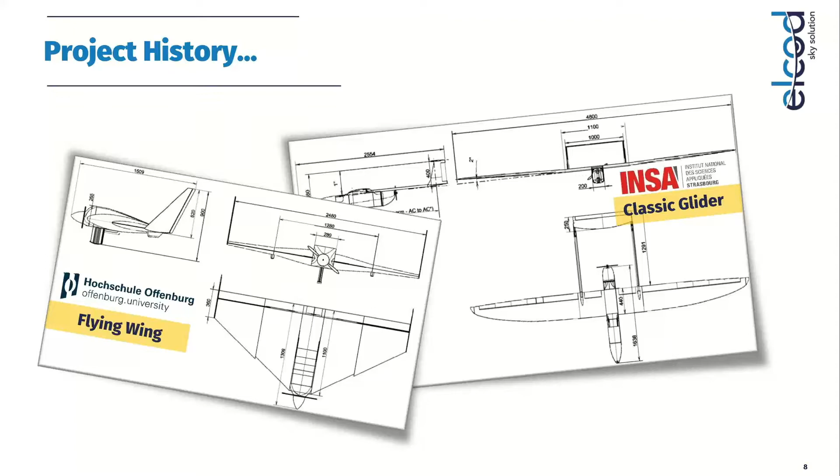So this results in 2 different basic concepts, also with some differences in the applications we had in mind, and this results in different building strategies. One was completely built from a wooden structure, and the other one with a fiberglass construction and molds. And so we will see that later on in the presentations of the 2 different designs, namely the Stork design of the Strasbourg team and the Delta design from the Offenburg team.

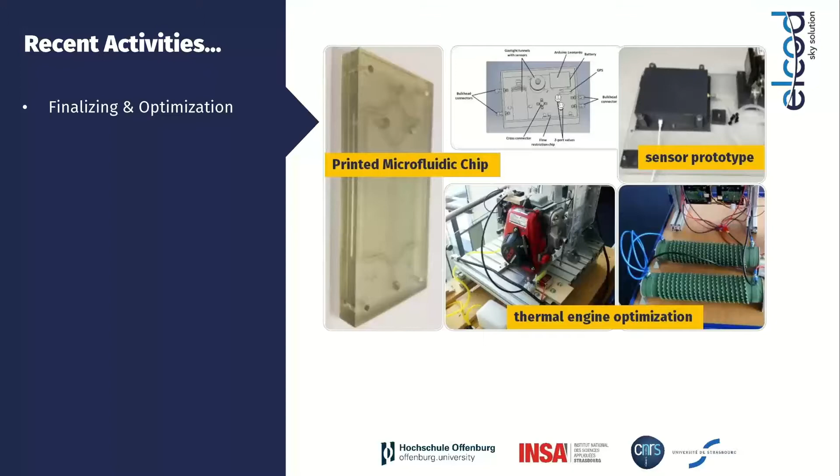In addition, we are happy to announce that there are two PhD theses starting now based on this project. Two former students that were participating in this project are now starting their PhD theses on different topics, and they will present you more details on their topics: optimization of energy management for a fuel cell based drone, as well as studies on flax fiber and flax fiber composites used for building drones. And you will see more details later on.

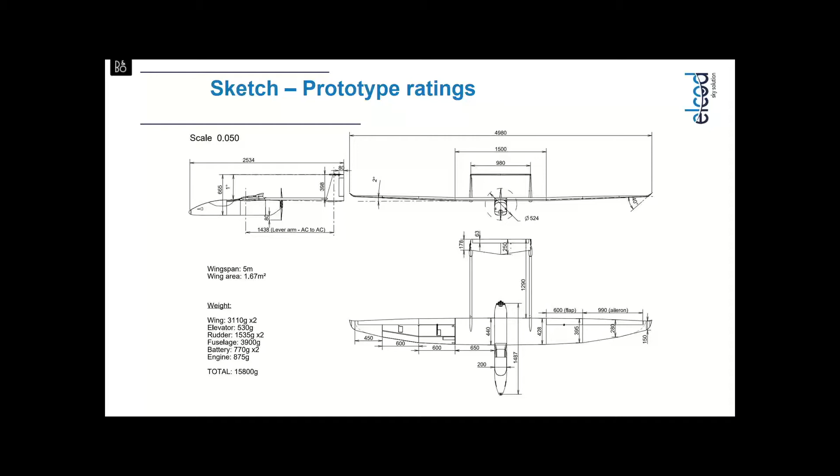Concerning the estimated performance at the beginning of the project, we estimated that the consumption would be about 360 watts at 25 kilograms with a velocity of 90 kilometers per hour, and with an efficiency...

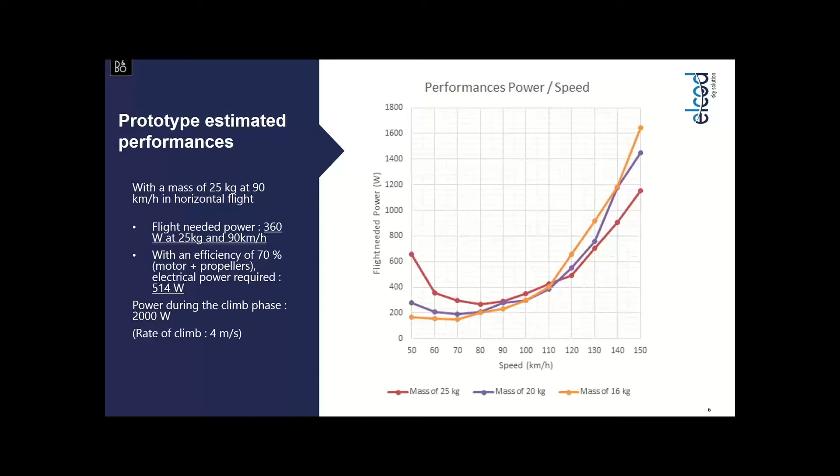...performances and the real consumption of the system. Here you can see a global assembly of the prototype and the different steps of building.

For the fuselage, we have chosen a classical way to conceive it in composite fiberglass and carbon, by conceiving the molds on a master building foam composite. The first wings are classically tooled by hot wire, and it will be composed of a sandwich of foam, wood, and carbon fibers.

The wing joiners you can see here are providing carbon for the tests and for the final system.

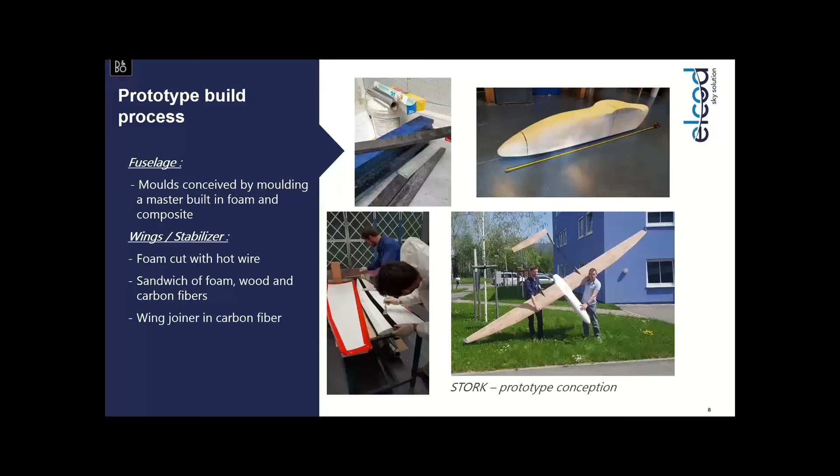Concerning the system assembly, we are able to embed a fuel cell of about 1000 watts from HES energy system, a hydrogen tank of 6 liters with a maximum pressure of 300 bars. The brushless motor will have a power of 2000 watts, and the weight, as I've said, without the fuel cell is about 16 kilograms.

Concerning the flight controller, we are using an open source Pixhawk 4 with the PX4 open source system, with GPS and so on. The power board has been designed by our team to be able to switch between two sources in case of failures, and the estimated autonomy...

...the tank, the fuel cell, the system for the payload space, and all the electronic and onboard system.

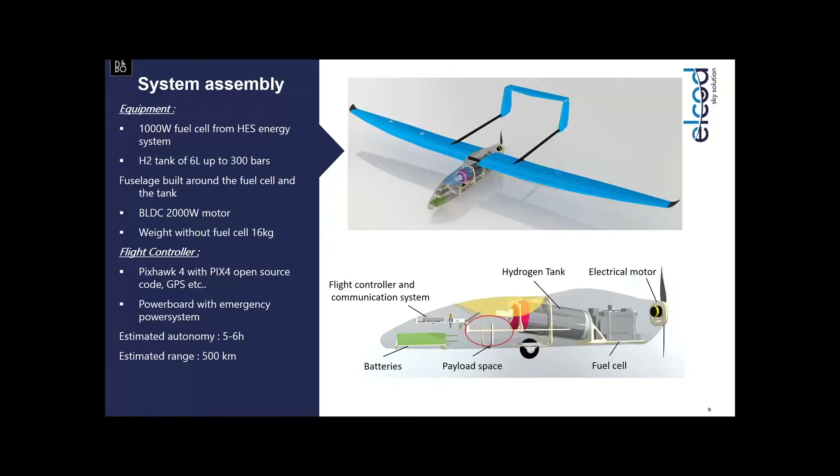Okay, so yes, the first prototype - we have done the first test flight in May 2020. For the moment we have done 21 takeoffs and landings, about 5-hour flights, more than 300 kilometers of traveling, with a classical cruise speed of about 90 kilometers per hour.

Finally, the power consumption has been measured in real flight at a mass of 20 kilograms, with flight tests at 20 meters per second, and the real consumption was about 400 watts. We have done some simulations with computational fluid dynamics and estimated the total power at 300 watts at 20 meters per second. So by considering the motor and propeller efficiency, it grew to 400 watts.

The stall speed for the system with a mass of 20 kilograms is about 12 meters per second, so about 40 kilometers per hour.

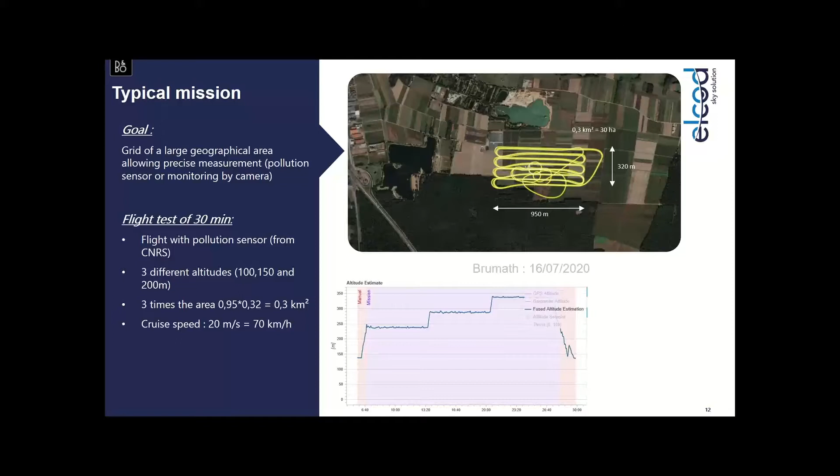And the flight tests have been done in electric flight without fuel cells, with a pollution sensor from the CNRS at 3 different altitudes: 100 meters, 150 meters, and 200 meters. And the cruise speed has been about 20 meters per second.

Another topic of our work is to do a dynamic control modelization of the drone to be able to estimate the result with a real flight compared to the simulation flight with the same real flight inputs of the system. And I will show you that later.

To conclude my presentation, we are working on the evolution of the Stork Mark II. The idea is to optimize the aerodynamic of the system by using molds for the wing, the tail, and the fuselages. The topic is to design the first biocomposite UAV with a fuel cell system, and the work is always focused on hybridization of the fuel cell, battery, and package.

Thomas and Martin will do their presentation about these topics. So the final design will be a 2-boom drone with motors and sensor integration, a wingspan of about 5 meters.

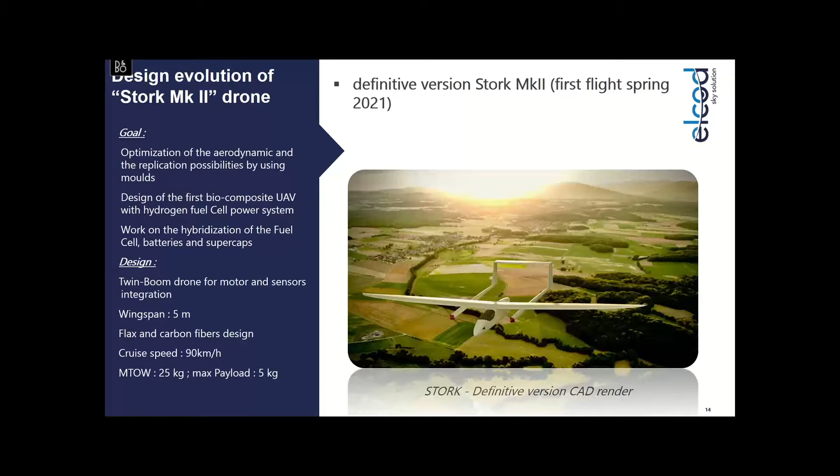The final system will be done in flax and carbon fiber design. The cruise speed is estimated to about 90 km/h, the maximum takeoff weight 25 kg, and max payload 5 kg. Here you can see an overview of the CAD of the Stork MK2.

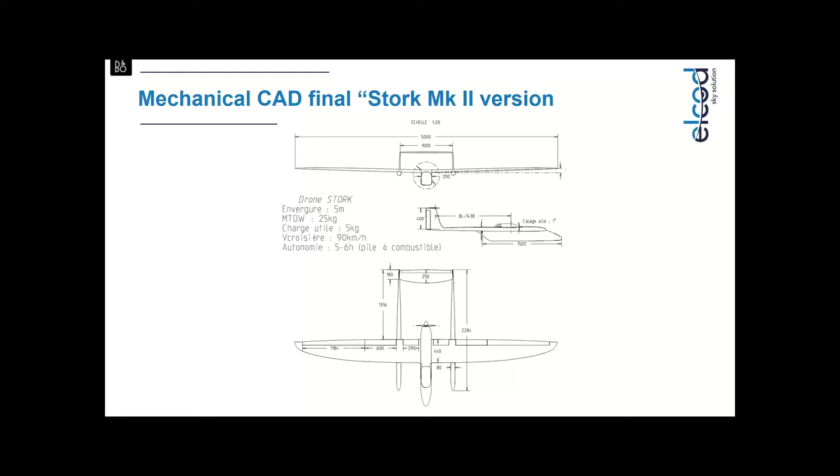For the moment we have tooled all the masters and built 2 of the 4 molds of the wing, and we expect to finish it at the beginning of next year.

To conclude, in spite of the context of COVID, the project followed a normal evolution, and we could propose at the end of the project 2 PhD theses: one PhD from Thomas Pavot concerning the optimization of the fuel cell system and the hybridization of the system.

It has begun the 1st of October this year. Martin Lefebvre is working on a biocomposite system, and his thesis has begun 1 year ago.

So the work from our team still continues. We are working on autopilot redundancy work, the optimization of the flight, the communication system, and the Stork building process, to be able to have a versatile system that could be replicated quickly. Thank you.

The structure is made of wood with a Ceconite covering, pretty traditional. The cowling is made of ABS, so it's simple to manufacture and repair. There's another word I can't read.

It's low cost, so there will be a wooden propeller on a 50 cubic 4-stroke engine with fuel injection. Stefan Steiger will talk about the fuel injection system. The engine is pretty heavy, but it consumes a very low amount of fuel, so this was the optimum for range and flight time. For communication, Iridium satellite communication will be used for long range.

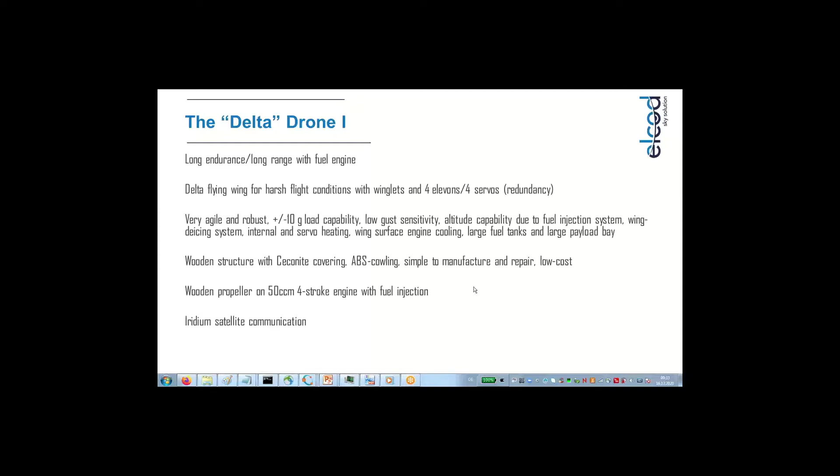Takeoff weight is 25 kilograms. It should fly up to 33 kilograms with reasonable performance. The empty weight is 15 kilograms, including the engine.

So there may be room for payload and full fuel. Wingspan is 2.56 meters, cruise speed around 110 kilometers an hour. The payload bay volume is in the middle at the CG: 30 centimeters in length, 26 centimeters in width, and 20 centimeters in height.

We have two 7-liter wing tanks, in total 10 kilograms of fuel. With 300 grams per flight hour, that would mean 33 flight hours and about 3,000 kilometers range. Takeoff is by bungee and belly landing - that's the idea with it.

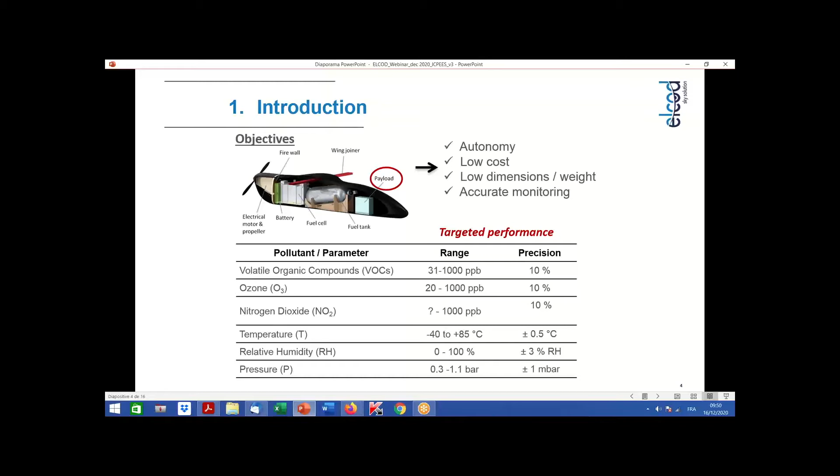So the objective is to have a multi-sensor box with good autonomy, low cost, low dimension and weight, to have accurate monitoring. Here are listed the ranges of concentration we expect to get. Basically it's up to 1 ppm, so 1000 ppb, for VOCs, ozone and nitrogen dioxide. We would also like to monitor the temperature, the relative humidity and the pressure, because all of them can have an impact on the sensor measurements.

Here is a general overview of the box. Basically, we sample air through a micropump. This air is gently heated up to 30 or 40 degrees, and then it's injected into a gas-tight tunnel where all the main sensors are installed. Here we have two valves to close or open this tubing or this reservoir, and then we have a second box where the remaining sensors are placed: the pressure, temperature, and relative humidity sensors, the VOC sensors, and the sensor to monitor CO2.

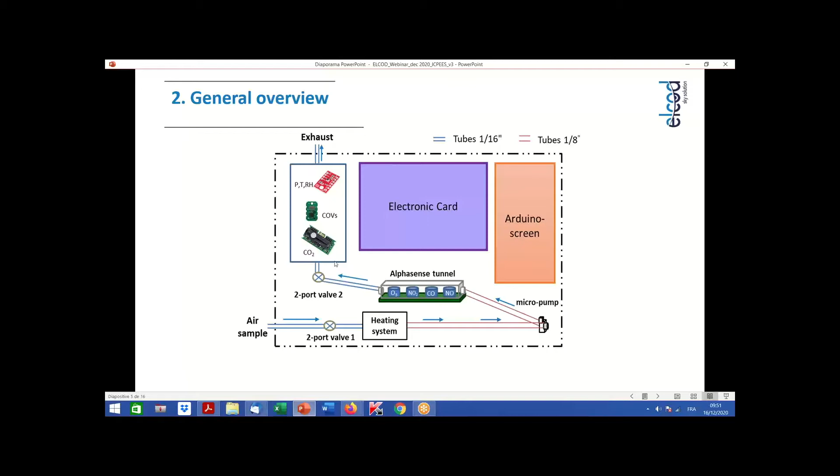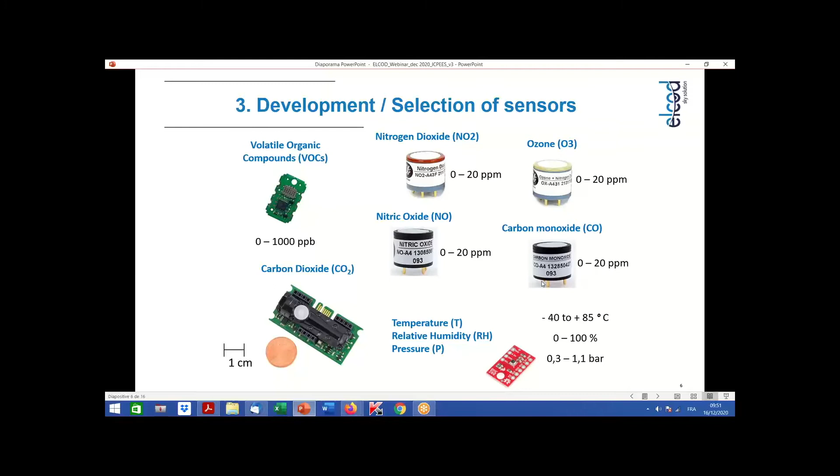So first we selected the sensors. And then we did the mechanical integration. First we designed the box according to the size of the different items, using CAD, computer-aided design, with Autodesk Inventor software. In this configuration, you have the Alphasense tunnel here with the 4 sensors. We have the 2 valves here and here, the heating system here, and the 2 batteries; with these 2 batteries we can get 4 hours of autonomy. We have the main electronic card here, and the additional sensor card in this box. And finally, we have the screen on the front of this box.

In terms of electronics, we have divided the electronics into 2 parts. We have the main electronic part here. I don't know if you can see my mouse. Yes, you see. Okay. Basically, this permits us to control and save the values recorded by the 4 main sensors here. This data is converted by an ADC, displayed on the screen here, and saved on an SD card here. With this electronic card, we can also control the pump, even the speed of the pump, and the 2-way valve, and we can also manage the 2 batteries and the voltage they provide.

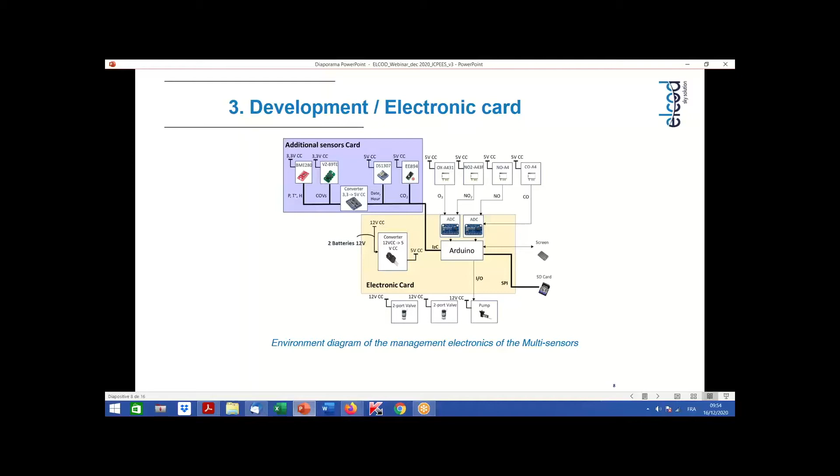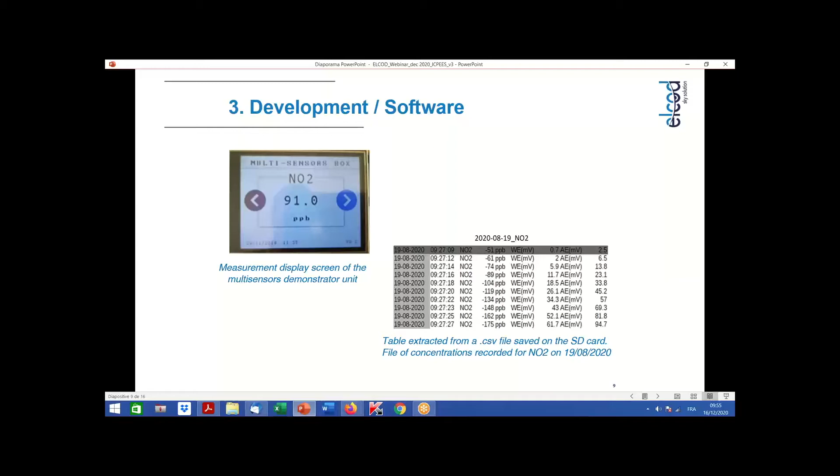In terms of software, we have developed a very small software to display the data on the screen and to save all the data in a CSV file on the SD card. This is the screen, and we can switch on the different components, so NO2, ozone, nitrogen monoxide, and so on. Here we have an example of the data for NO2. We have the time, the concentration, and also the raw data, which permits post-processing the data after they are saved.

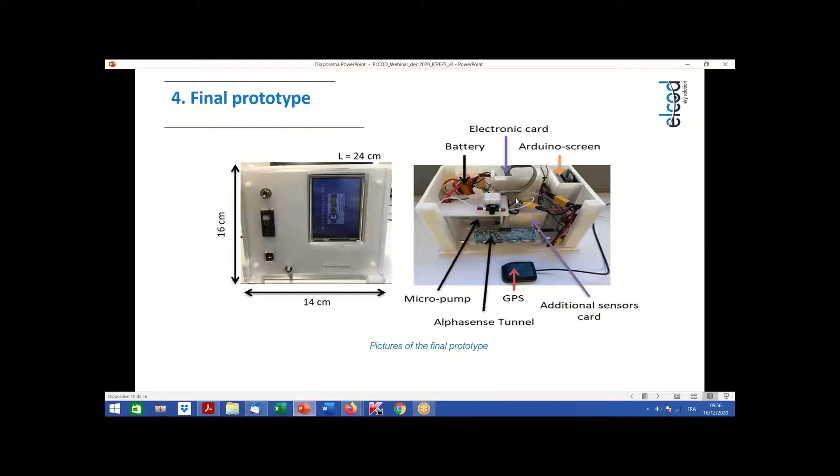So once we have developed this multi-sensor box, we need to calibrate and to validate the sensor response of each sensor. So first, we need to generate a known mixture of gas. So we use an ozone generator. We use also some gas mixtures of NO2, NO, CO, and so on. And we use air for dilution.

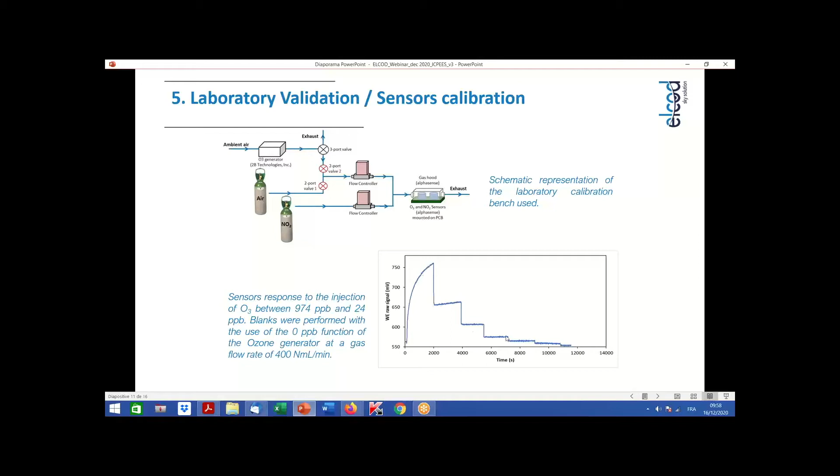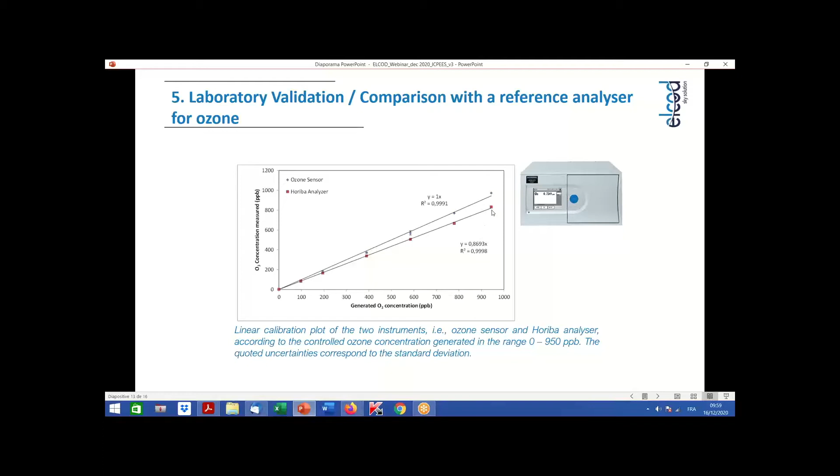So finally, we did some calibration. Here, this is the ozone concentration measured versus ozone concentration generated for two devices. So the first one, the blue one, is the ozone sensor, and the red one is the Horiba analyzer, which can be considered as a reference for ozone monitoring. And we can see that we have a very good agreement. We have only 13% of difference between the two instruments.

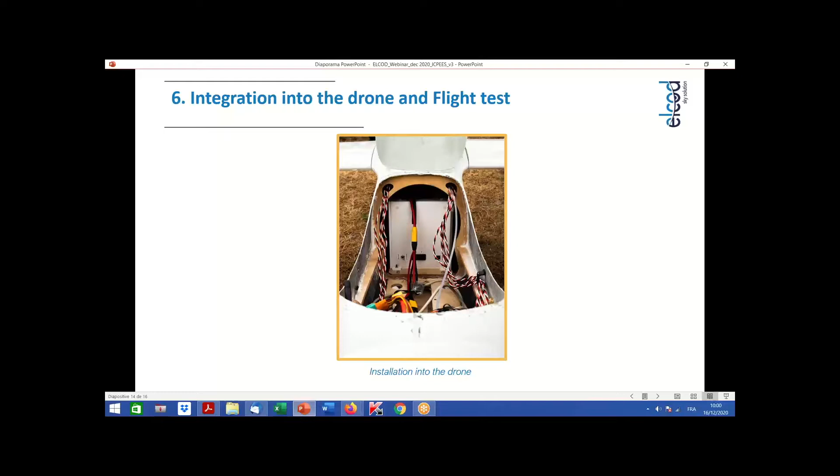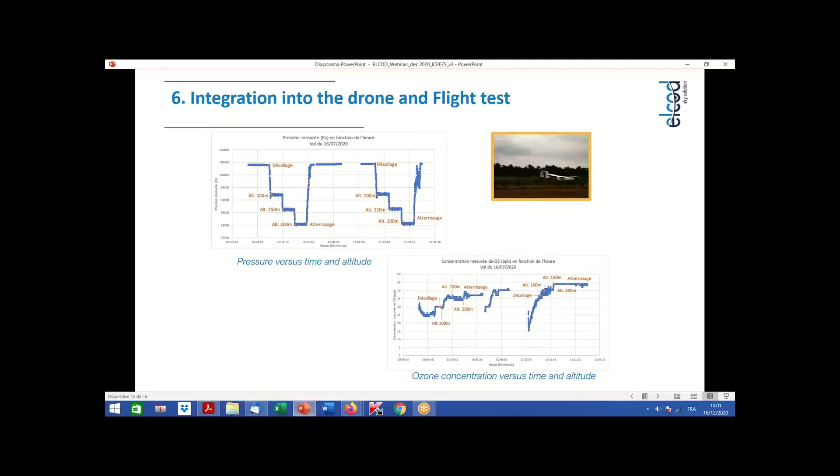So in terms of conclusion, we have made the conception, and we have designed the multi-sensor box. The sensors were selected to reach ppb level. Sensors were integrated on Arduino. We have successfully developed the mechanical, electronics, and software parts. Air pollutant sensors were tested and calibrated for ozone, nitrogen oxides like NO2 and NO, and carbon monoxide as well. For ozone, we did a comparison with the reference analyzer, which is promising.

So we have fabricated 3 sensor devices. We have also done a demonstration during the preliminary flight. More flights are needed to get some data. I think it could be possible after the health crisis. And in terms of perspective, we expect to integrate some sensors to monitor particles in the range 0.3 up to 20 micrometers.

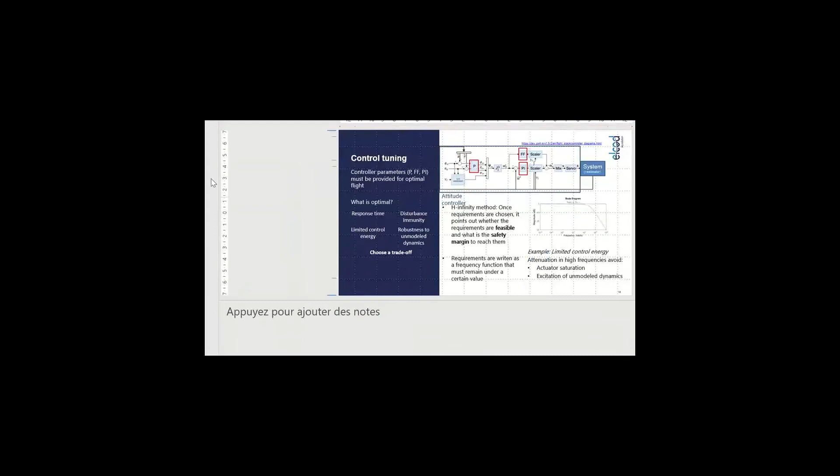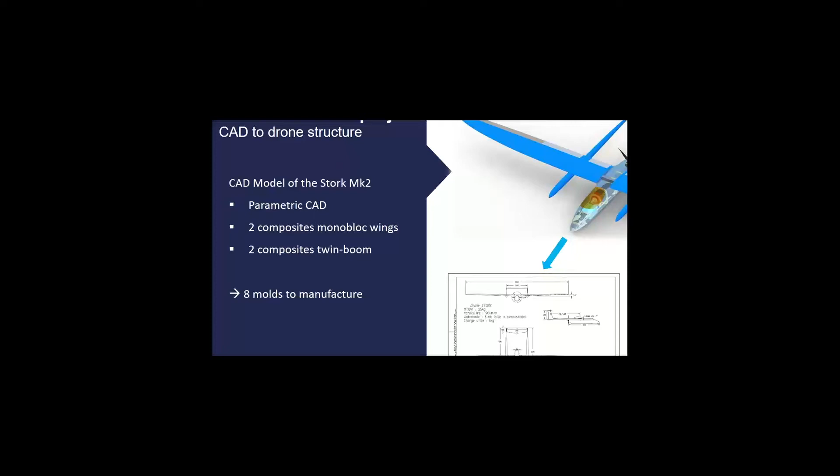Can you see the second slide? Why? Try it again. There's a little problem on our presentation. Sorry, there is a little problem. It's okay, I think. Yes, normally it should work. No. It's okay for you? Yeah. Okay, so now it's working.

I'm sharing the screen. So I was in charge of the CAD of the prototype, the first one, and now I did the CAD of the Mark II drone. So you can see the CAD with twin boom composite structures and 2 monobloc wings. And the idea of the CAD is also to do the sketch.

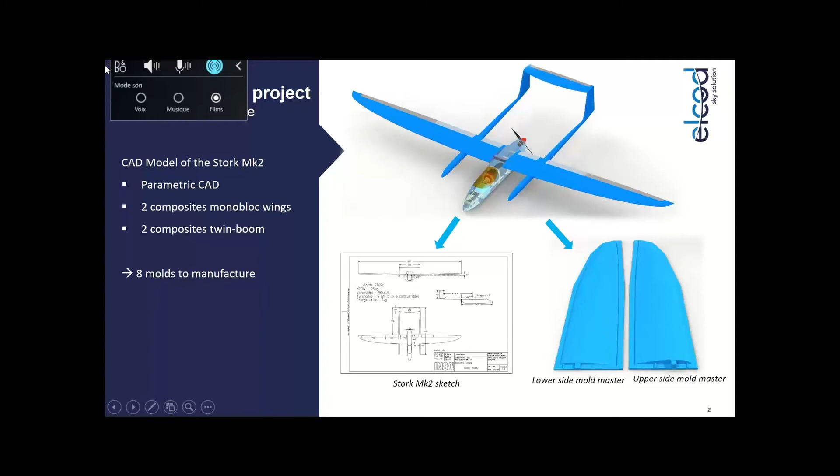Yeah, the screen is not at a good size. Okay. Yeah, I do apologize for this.

And the idea is to use this CAD to do the master and the mold of the drone, because as Renaud mentioned, at the beginning we did it in a conventional way, and now we want to produce molds for a small industrial process.

Fabrication with computer, and after, to use machining, we went to a college in Strasbourg to manufacture all the masters. And at the end we have the last picture. You can see that the mold, the masters of the drone are finished, and we still have some steps I will present to you just after.

And the idea of this process is a low-cost process because we use MDF. It's a medium density fiberboard wood, and it is a process that we didn't see in the past. So it's a good investigation to use this low-cost process to manufacture the master.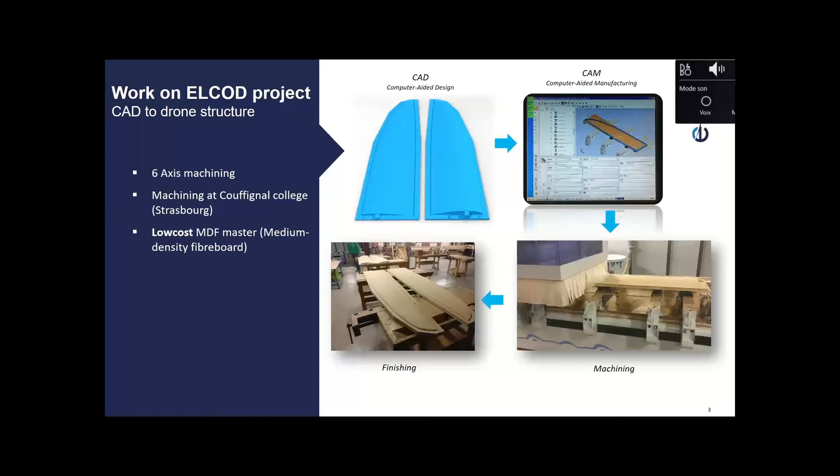After the master, the machining, we have a lot of steps to have a mold. The first one is to paint the master, to polish and to gel coat. And you can see after all this process our colleague that is working on the mold. And the final step is, with the mold, to manufacture the final version. We finished 4 molds of 8, so we are basically at half of the manufacturing.

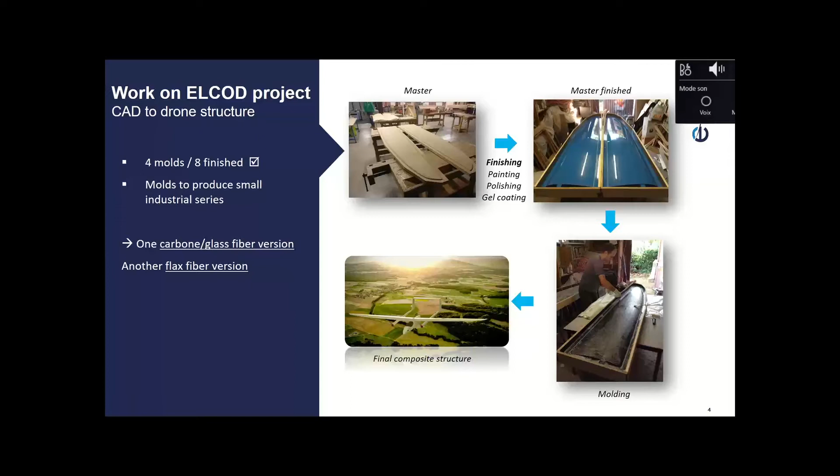And the idea of the mold is we can after build many versions. The first one will be the composite carbon fiber structure, and the next one will be with flax fiber. This is a good transition to my PhD project. And this is the future work that we have to do on the MK2 project Stork drone.

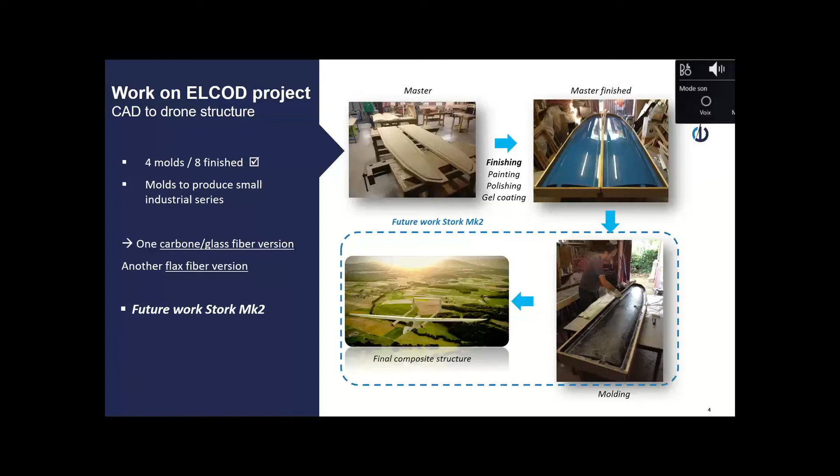As it was mentioned at the beginning, my PhD project was about how to replace glass fiber with flax fiber and to design the world's first long-range bio-based UAV. ELCOD was an interesting project because with Thomas, it's our graduation at INSA and after the beginning of our PhD. So it's a very interesting project.

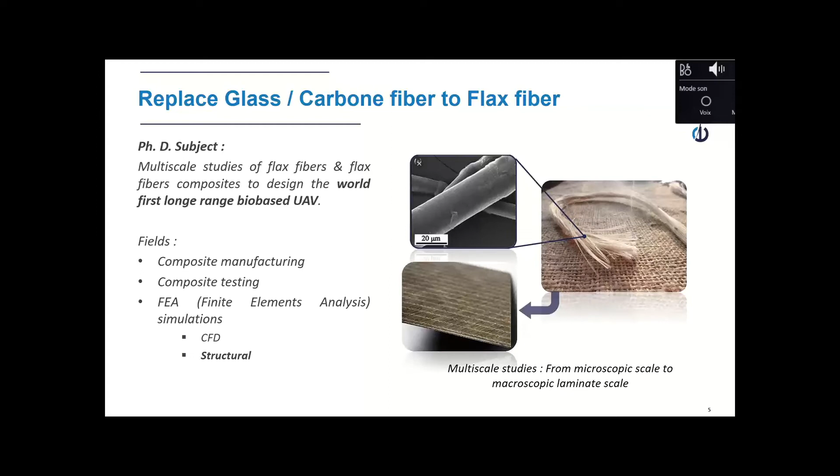That is why back in the past, the Concorde was made of aluminum. And now with Airbus and Boeing, half of the plane is made with carbon fiber. So we hope next year to have the Stork drone made with flax fiber. It's also a second point because we want a low-cost process, a low-cost drone, and when you see the cost in euros per kilogram, flax fiber is comparable to glass fiber, and it's cheaper than carbon fiber.

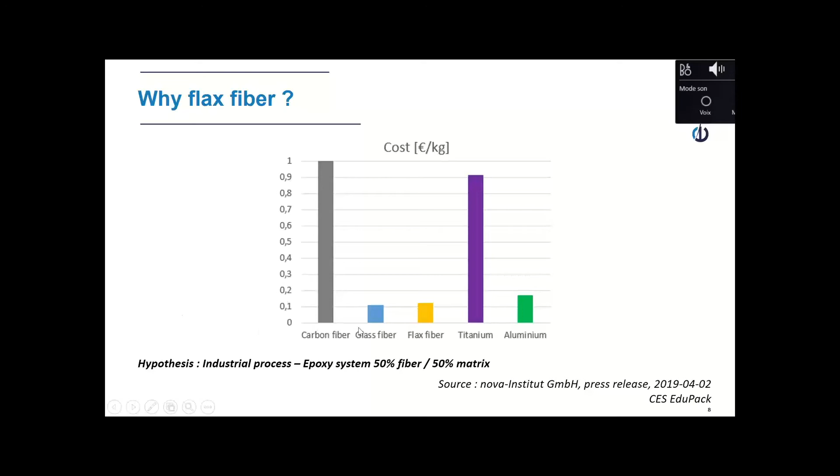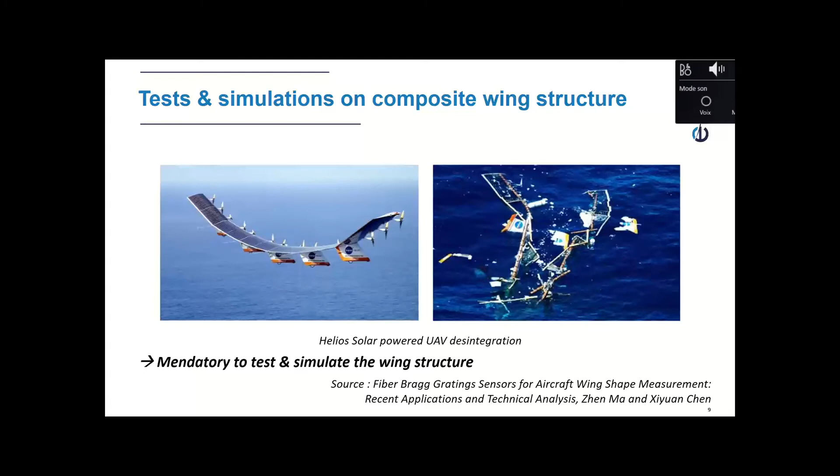Now the heart of my PhD project is simulation on flax fiber. Why it is important to do simulation: to avoid disintegration, as you can see, when the lift is too important and the deformation is too big. And this is why it's mandatory to do tests and simulation on the wing structure. It's what I am doing on this project. So you can see the wing, the spar, the skin, everywhere.

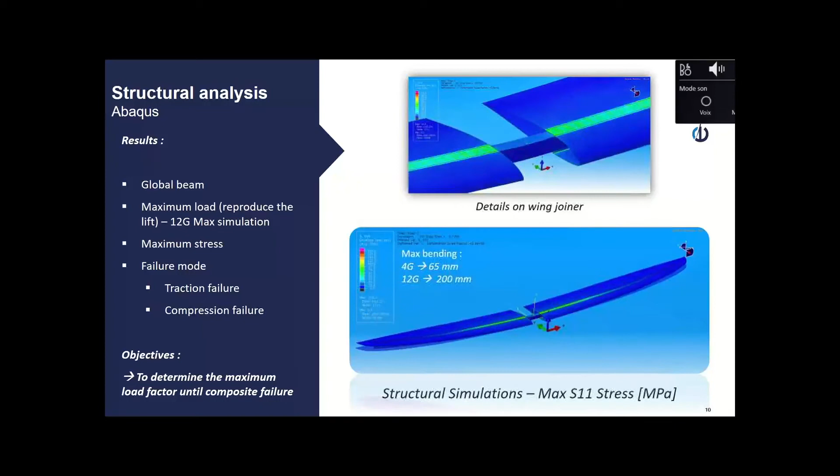I put the simulation to 12G because it was in the book of specifications at the beginning of the project. The failure has to occur after 12Gs. And there are some results that I have with simulation. The first one, I will compare carbon fiber and flax fiber.

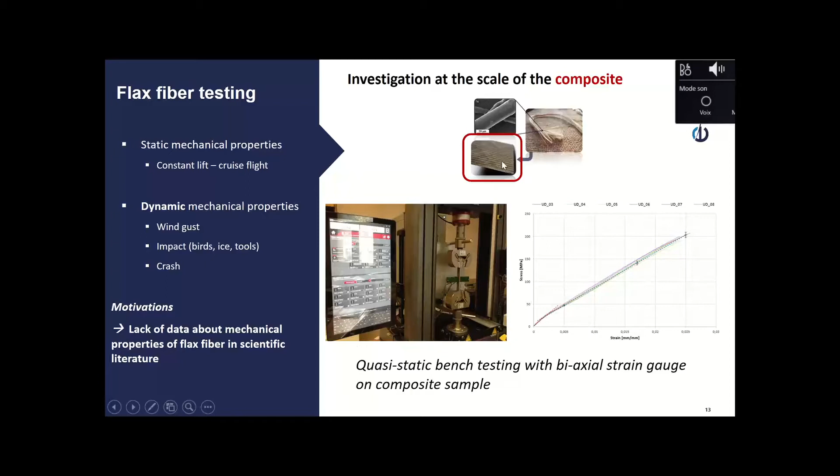This is the scale of the composites, as you saw at the beginning of the presentation. And now I am also investigating at the scale of the technical fiber. As you can see, we just did tests. Here is a small fiber, technical fiber, and we did tensile tests on this fiber. It's also interesting to do static testing and dynamic testing that we will do in the following months.

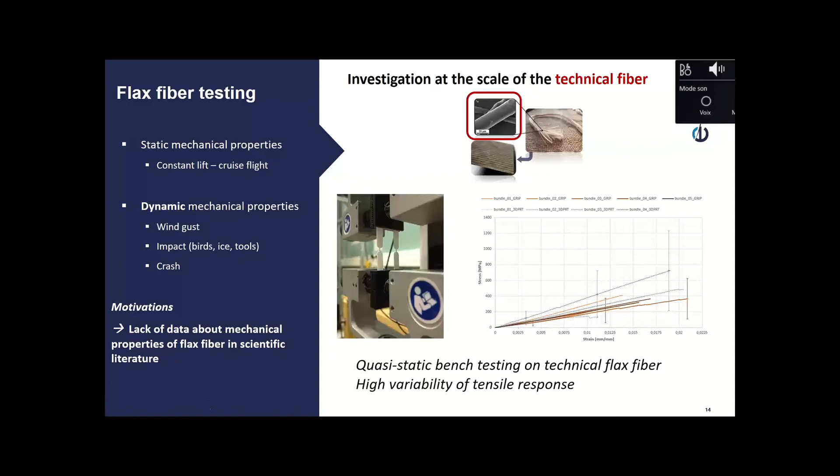But the biggest problem with technical flax fiber is the high variation in the mechanical properties because the diameter is not very constant and there is high variability on the diameter. That is why the future work of my PhD, which will start next January, will be not to investigate the technical fiber, but to isolate elementary fiber and do tensile tests on this elementary fiber.

So we did tests on a fiber with an average of 100 micrometers. And the next step, next month, will be to do tests on a 10 micrometer fiber. We hope that we'll avoid tensile variability. And also, it's a very original publication. We have to do a very good publication because we didn't see publications about the impact of temperatures and dynamic testing on this fiber. So we have to do very interesting research about this flax fiber.

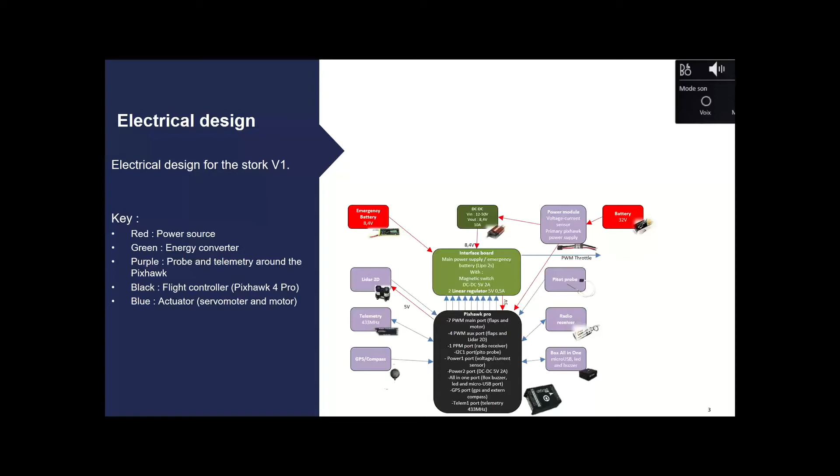In order to ensure redundancy, we have provided a backup battery to power the flight controller and all control surfaces in the event of a failure of the main power supply. The interface board allows switching from one power source to the other in case of failure. It also allows PWM signals to be transmitted to the various control surfaces. We have 8 different control surfaces, and the motor.

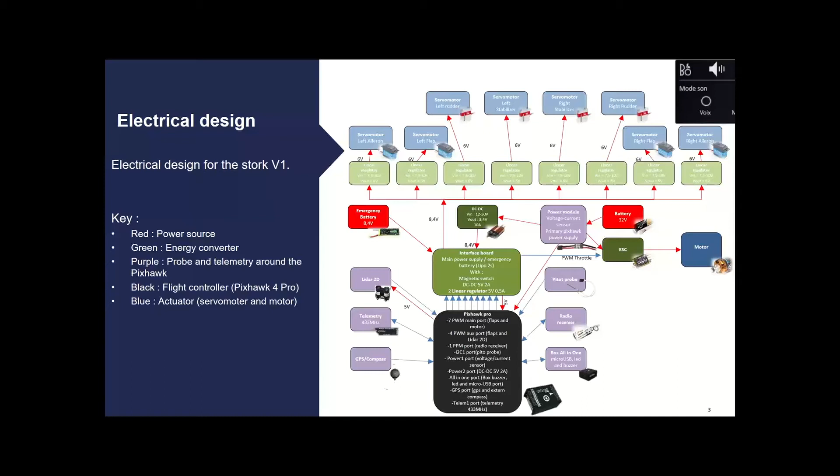Now I will talk about the communication system. With the drone, we would like to have a link everywhere between the drone and the ground station. For now, we have flown with a classical telemetry module, which has a range of 1 kilometer. Of course, we want to fly for several hours and at a distance of 100 kilometers or more, for example. For this, we need to develop a long-distance communication solution. Our idea was to use a mix between GSM and satellite communication.

The best solution is satellite because we can have the link between our ground station and the UAV everywhere, but it's very expensive. So for flights where we can have the GSM network, we will use it in priority. During this project, we developed the GSM solution. The interface between the flight controller, the Pixhawk, and the GSM module is made using a companion computer, such as the Raspberry Pi.

The data is sent and stored in a database hosted by the ground station, and we can track our drone in real time on the ground station. We can also send an order from the station to the drone, such as return to launch, for example. This system has been tested and works on a quadcopter. Now we need to integrate the system on the stork.

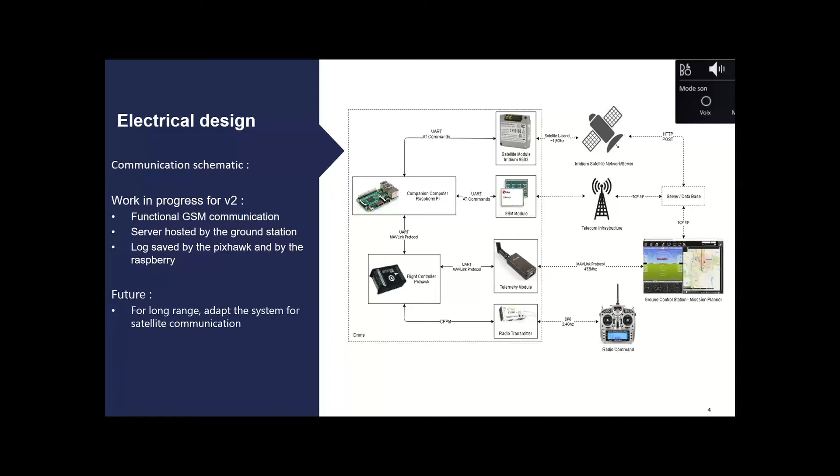One of the objectives of the HELCOD project was to see if a fuel cell could be used to power the UAV. We bought a 1000 watt fuel cell from HES Energy System, and we built the drone in order to integrate the tank and the fuel cell in the fuselage. We have not conducted flight tests with the fuel cell for safety reasons, but with a consumption of 450 watts, the drone is able to fly around 5 hours.

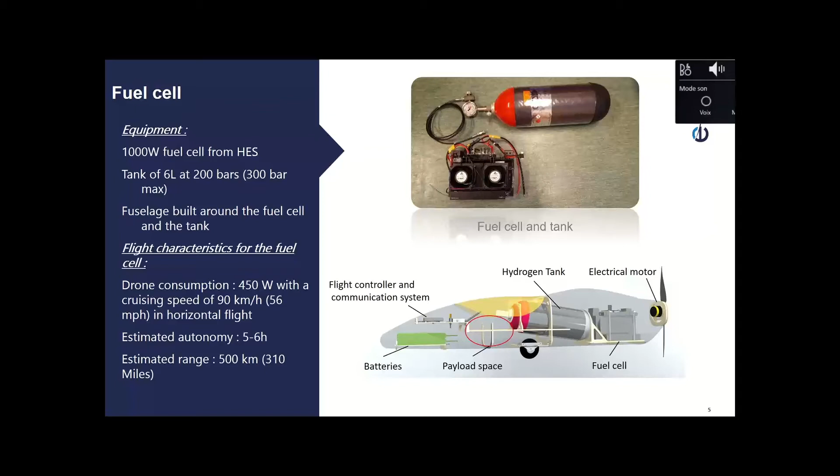However, we did some tests with the fuel cell on a test bench equipped with the UAV electronic speed controller, the motor, and the propeller, in order to be as close as possible to the flight condition. We pushed the power from 0 to 1600 watts at full power in order to simulate a takeoff. We did several tests lasting about 30 minutes and one test lasting more than 1 hour at 500 watts.

And we noticed an issue with the fuel cell. We had a voltage drop every 10 seconds from the fuel cell caused by the purge. During this instant, the LiPo battery takes over, but the LiPo voltage is lower than the fuel cell voltage. This leads to a drop in RPM from the motor. This problem showed us that hybridization was not optimal between the fuel cell and the batteries.

So with this idea, we chose to start a PhD. Now I am doing a PhD named HELCOD for Hydrogen Endurance Low-Cost Drone. This PhD started in October and will finish in 2023. The title is Optimization of Energy Management in a Drone Equipped with a Fuel Cell-Based Hybrid Source.

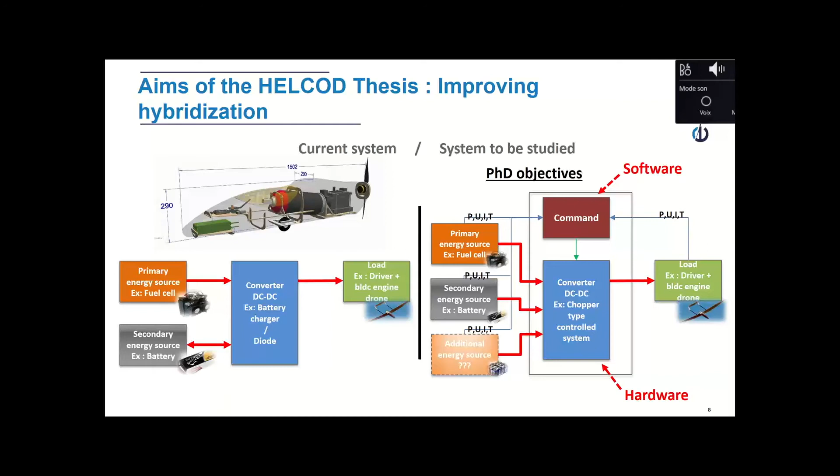We would like to use a new strategy for the command of the electronic card, for example, optimal control or predictive control. I will present my work plan for the PhD. So first, I need to know as much as possible about hybridization systems and energy management strategies. So I am doing a state of the art, and I find hybrid systems in, of course, electric vehicles and also uninterruptible power supplies.

After that, I will model my different energy sources, fuel cell, supercapacitor, batteries, and the drone from the point of view of an energetic system. With this model, I hope to be able to test control strategies such as predictive or optimal control and develop an electronic card. And at the end of the PhD, we would like to implement and test this system to measure the efficiency compared to our current system. So that's my goal for the PhD. So I'm going to let Anna speak about her work.

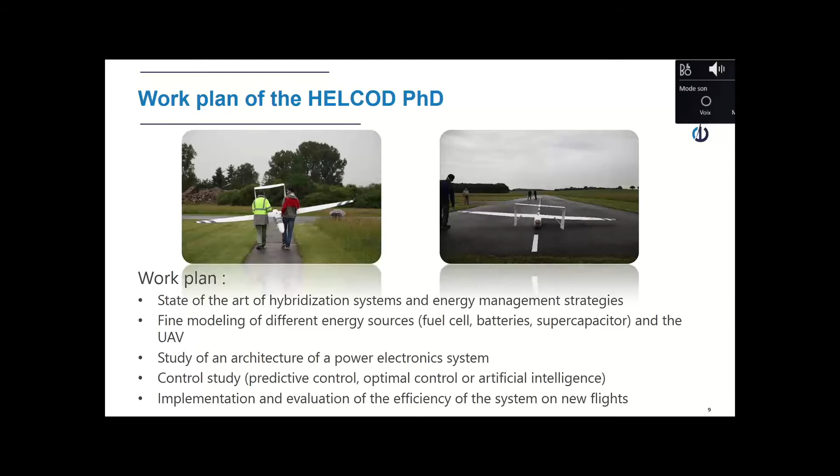Good morning, everyone. In the following, I will be talking about the modeling and the automatic control of the drone, particularly the attitude control and the drone's torque, and explain in detail what was the train of thought and some of the results we have had throughout the HELCOD project.

So if we are interested in proceeding with the automatic control of the drone, first we have to consider some prior steps. First of all, we have to provide a mathematical model of this drone. Then we validate this model by building a flight simulator. And this flight simulator is also a platform to tune the controller.

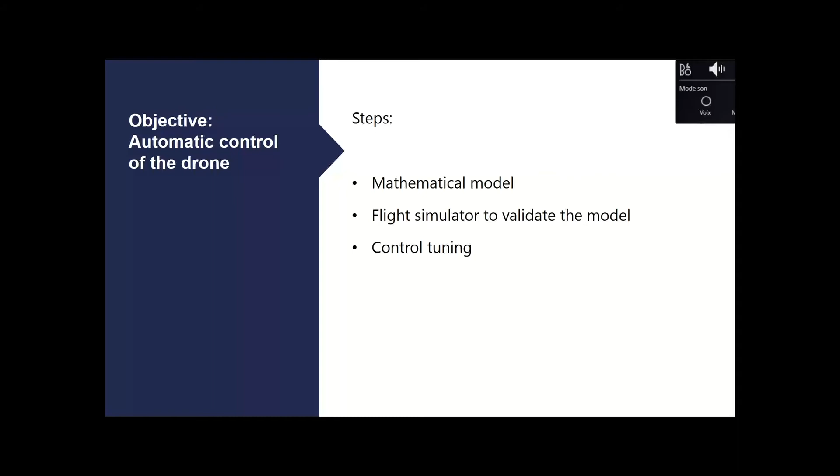So talking about the controller, my colleague Thomas Pavot has presented this scheme of the PX4 controller, and we have some strong motivations for using this platform. First of all, it is an open source and off-the-shelf product, which can speed up the process.

The controller is also architecture portable, so in case we would like to use different types of drones, we would be able to do it. And we are able to implement different control strategies, such as manual, stabilized, loiter, at altitude, mission, and so forth. What's interesting is that many of these strategies come pre-programmed.

I will be focusing primarily on two types of control, the position and the attitude controller. We can consider them to be in layers, the position controller being the outer layer and the attitude being the inner one.

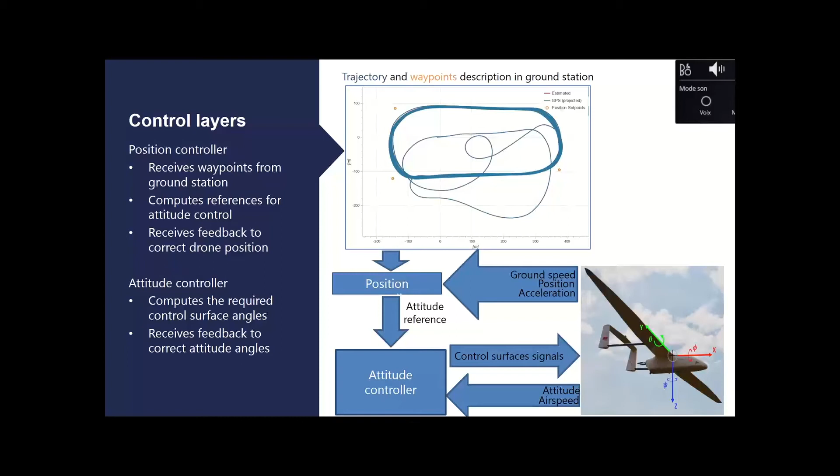And it receives feedback from the plane so that it can correct the attitude angles so that later on the position can be also ensured to be followed according to the project.

So, as I said, PX4 controller proposes different pre-programmed controller architectures. Here I have brought the attitude controller architecture from the PX4 platform, PX4 website. And what we see is that here we have the controller, but the controller cannot function by itself. It serves to make the system, the drone, work in a desirable manner.

So for that, we also have to propose the values of the control parameters that I have highlighted in red, and they must be provided so that we reach the desired optimal flight and optimal behavior. This is what we call the control tuning, proposing these values of parameters of the controller.

But for us to tailor a controller that is good for a given system, some knowledge of the system is fundamental. What we call the obtention of the system model is called system identification, and I will be detailing this in the following.

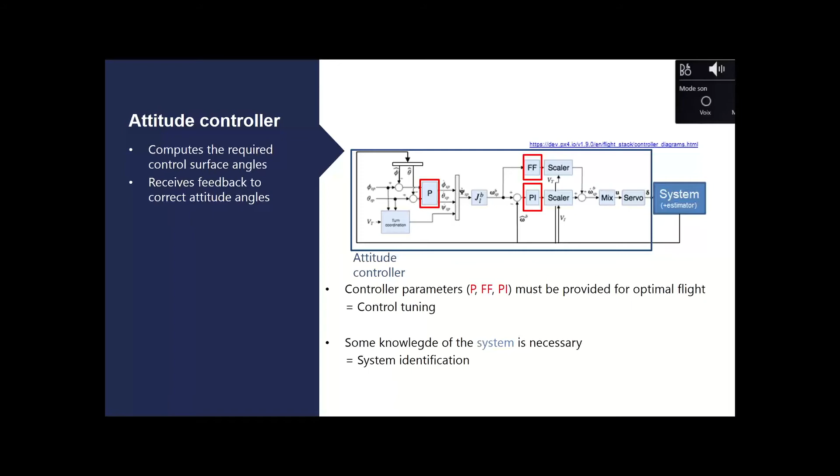So for us to do the so-called system identification, first we have to choose a mathematical model, and then we have to collect data from the aircraft and try to fit this data at its best to the mathematical model.

So, considering certain simplifications, such as considering that the axes of the airplane are decoupled, we can reach this mathematical model. Here I have highlighted that there are two unknown parameters, and we are going to collect data from the aircraft and try to make these parameters fit at their best.

We have used two methods: the in-flight method that actually uses flight data, and the off-flight method that uses a virtual aircraft model. So the first identification method is this in-flight method.

Here I have the roll movement through the movement of the ailerons. What we do is that the pilot inserts arbitrary signals in the ailerons, and exclusively in the ailerons, at different times. So here I have brought four examples of manual signals given by the pilot to the ailerons.

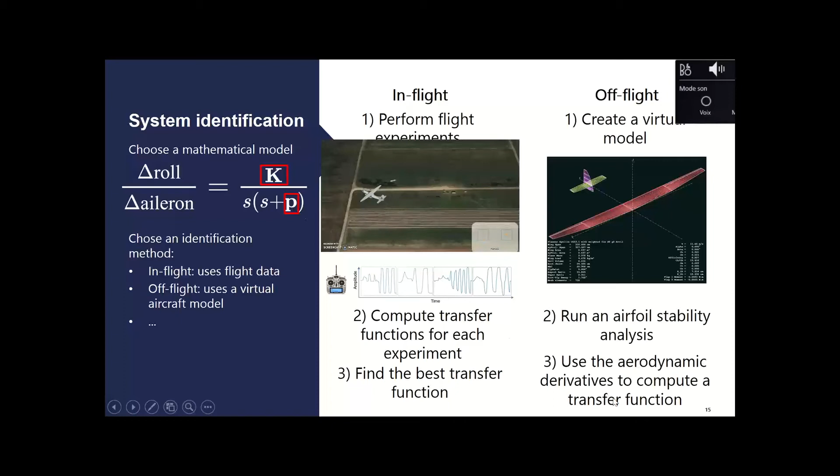So once we run it, we obtain several data, specifically aerodynamic derivatives, and these aerodynamic derivatives enable us to compute this transfer function, because the coefficients k and p are dependent on these derivatives.

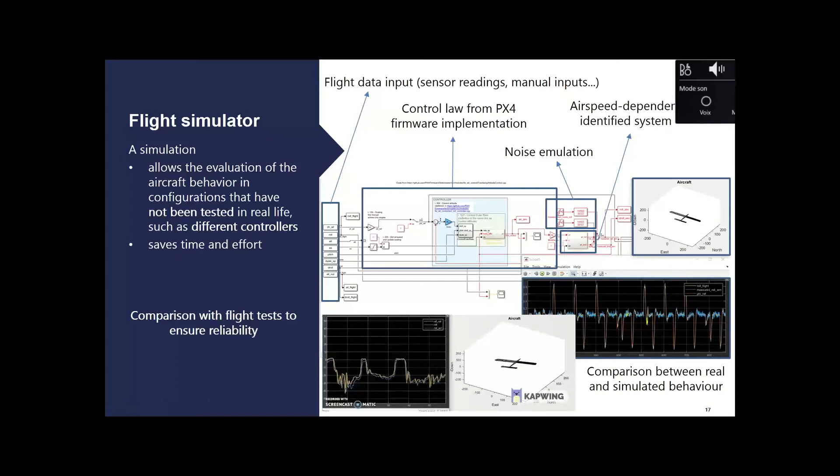That means to tune the control law. Recalling the design of the controller that I have exposed to you a couple of slides before, we have these unknown parameters, for example P, FF, PI, and some others. They must be provided for a good flight, for an optimal flight.

But then an important question is, what is actually optimal? It actually depends on the project. We can consider that optimal is when we have a fast response time, or if we have limited energy, and that's the case of the drone, we would like to prioritize a limited control energy, or we can consider the disturbance immunity, or even the robustness to unmodeled dynamics.

Some of these objectives, for example response time and limited control energy, are an antagonism, so we actually have to choose a trade-off between these objectives. For working with this trade-off and finding the good parameters for our project, we have used the H-infinity method. In this method, once our requirements are chosen, this method points out whether the requirements are feasible or not, and which is the safety margin that we have until we reach the undesirable behavior.

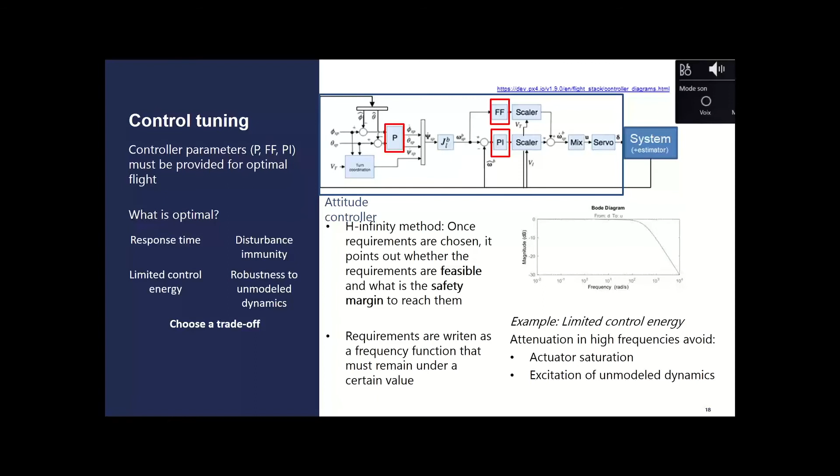So if we're talking about the limited control energy, we have the interest of some curve that behaves more or less frequentially like this. In the high frequencies, we want the control to attenuate its outputs, and this is interesting so that we avoid problems, because we must consider that once we identify a mathematical model, there is always some unmodeled dynamics, because we were looking, first of all, at a simple model.

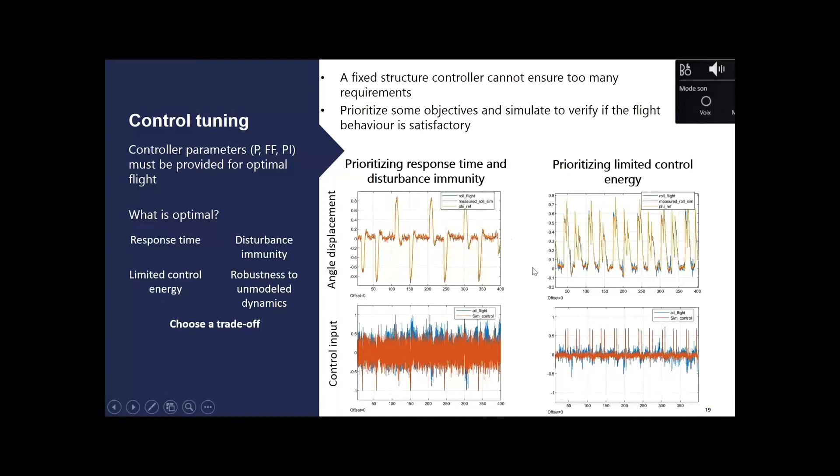I would like to highlight that I didn't present the future work for this, but among the future work, we can envisage we would like to perform more experiments as well to try the different control laws. Unfortunately, we couldn't do that because of the pandemic. But we were able, with the results we have gathered so far, to publish one paper at the IMAV conference, and I hope we'll be presenting some videos or material about this conference. We are also preparing a second paper where we show some results, particularly in the control tuning that I discussed at the end of the presentation. Thank you.

I will quickly show you a video we have taken at the IMAV competition. We used to participate in the IMAV competition every year with the students, the PhD students. Why? Because IMAV is a very interesting competition. It includes a competition and a scientific part, so it's possible to present a paper and participate in the competition. The idea now is to present you a sum up of what the IMAV competition is, and we have participated in the outdoor part of the competition. Last year, the INSA team took third place at this competition.

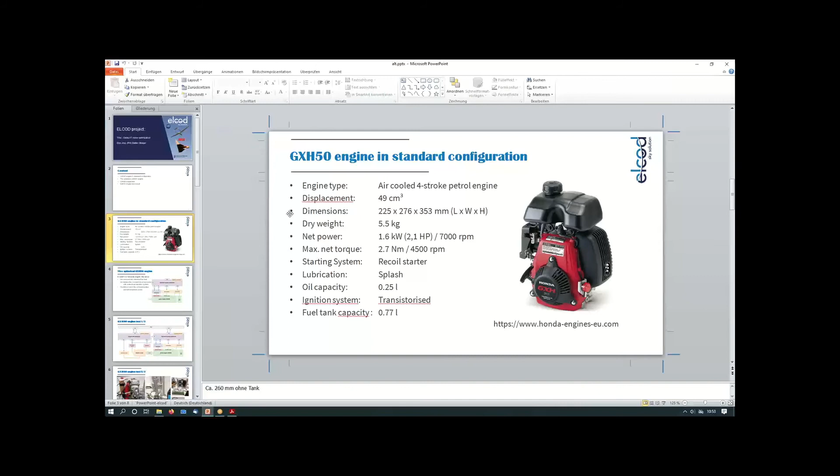Okay, hello everybody. I want to give you a small overview of the optimization of the 4-stroke engine which we like to use in the Delta Ring. At first the content: our 4-stroke engine is from Honda and it's called the GXH50 engine. At first we look at it in the standard configuration, then we show a little bit about the modified or optimized engine, then how we test the engine, and at the end we show some test results.

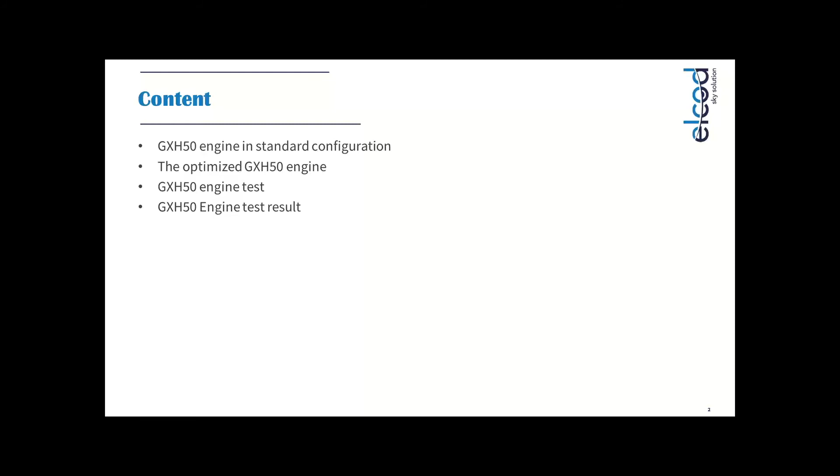So the engine in standard configuration is a normal 4-stroke engine. It's a big engine and it's also a heavy engine. This engine is designed normally for work on the ground, not in the air. It's designed for a long lifetime, normally used for electric power supply stuff or for pumping. The weight here you see is 5.5 kilograms, but it has a power of 1.6 kilowatts.

The recoil starter, the lubrication is a splasher. We don't know if this is a good splasher for flying, because this splasher means that on the crankshaft there is something like a finger, and this is rotating and hits the oil, and the oil splashes through the whole engine. So we have to look, is this a good lubrication or do we have to change something?

But at the moment it looks perfect. The next thing is the oil capacity: what we have in the engine is 0.25 liters, and the ignition system is a transistorized ignition system. It means only that the contact breaker is not a direct switch. So on the ignition coil, you can short circuit it over the transistor, and you can shut off the engine. And the fuel tank capacity doesn't matter because we remove it.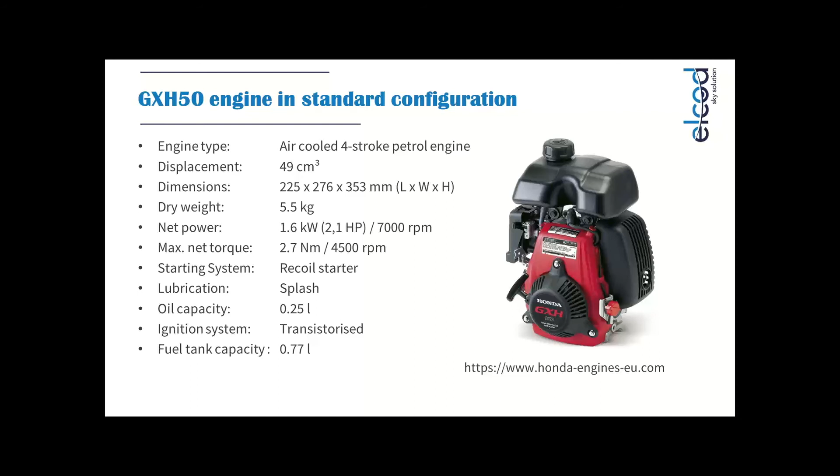So the optimized engine, at first I will say the engine will be the same as before. We don't mill anything on the crankshaft or optimize the crankshaft or optimize the cylinder. We only change something in the parts mounted on the engine. One thing is we remove the standard fuel tank, and another is we replace the constant level carburetor.

Because the constant level carburetor has, I think, some problems when you fly with it, because when you get low G maneuvers, the engine gets too much fuel and it can shut off. I know the Spitfire was flying with this type of carburetor, but later they changed it to another one. And there are different carburetor types you can use.

You can also use a membrane carburetor, like a Walbro or whatever. We use a Walbro carburetor in our helicopter. It's working fine, but the problem is when you change the height in a really short time, then you have to calibrate the membrane carburetor. And so for us, it was easier to create our own electrical injection system, because we are electronic guys and not mechanical guys. So for us, it was much easier to go this way.

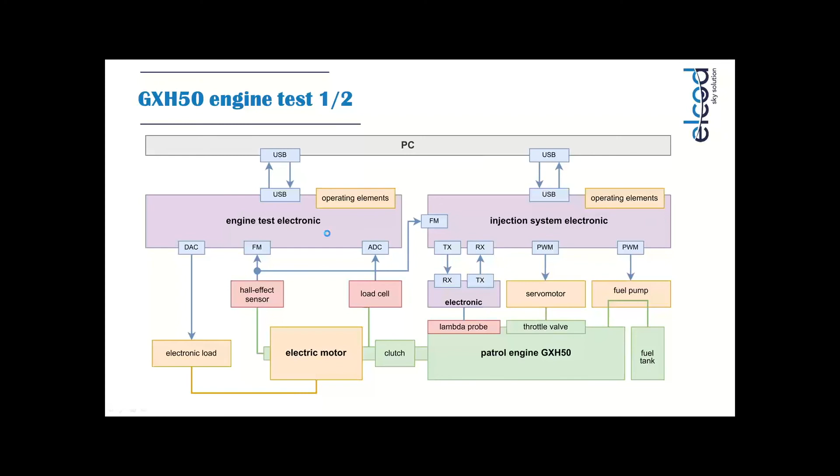So go to the next page. I hope we go to the next page.

Yeah. Here we can see the engine now with the lambda probe in the exhaust. Then here is the standard servo motor. It's with, how we call it in English, a Bowden cable or something to the throttle valve. And here you see the clutch. You also here can see the clutch, and here is now the engine, the electric engine.

This part of the engine here normally is mounted on a frame, but in our case we don't mount it on the frame because we mount it on a lever, and over this lever which presses here on the load cell we get the torque. When you don't have the lever here, then the engine can also spin completely free. Normally only this part is spinning free, but we have mounted it so that the whole engine can spin free, and it's only held with this lever to the load cell.

And so I have to move it again. Here you see the current sink. What we do, we don't regulate the power of the load. We only regulate the current. This had a reason because when you change the RPM of the engine, then it also increases the power. Because when you have more RPM, then the voltage is increasing, and when the voltage is increasing and you have the same current, you have more power.

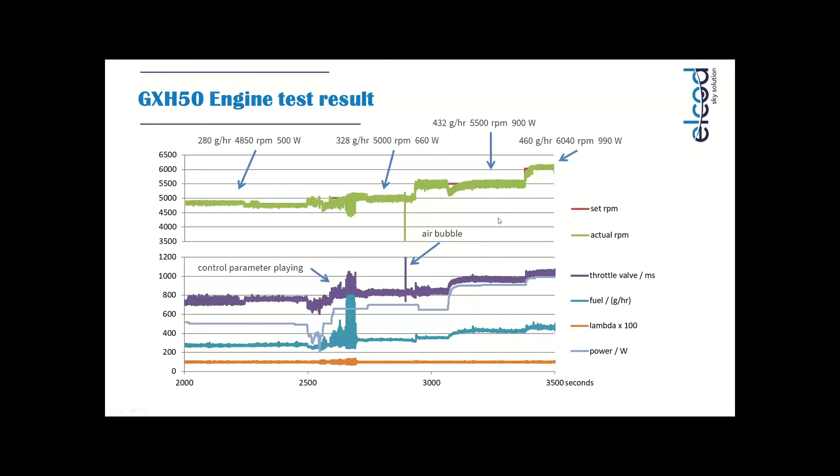I think we could discuss all these topics at the end of the presentation. Jörg will end the presentation. Are you ready, Jörg? Yes, I'm here. Thank you. If you pass the control. Yes. Okay.

Okay, thank you very much for your attention. Thank you for the interesting talks we heard, and I would like to give you some outlook and conclusions from the project, which is now finishing. I think the official end date is March 2021, so there's still some time to finalize some topics and to improve some topics. You see that there is still some ongoing engagement, and that different topics evolve from this project.

So again, the basic idea was to develop a low-cost, environmentally friendly and cost-effective long-range UAV, and I think we succeeded in doing so. We've seen two designs which successfully made their maiden flights and went far beyond a maiden flight. Presently, we are at a level where we have automatic flights, automatic starts and landings, and we are quite optimistic to further develop these prototypes into application-ready, let's say, technology carriers.

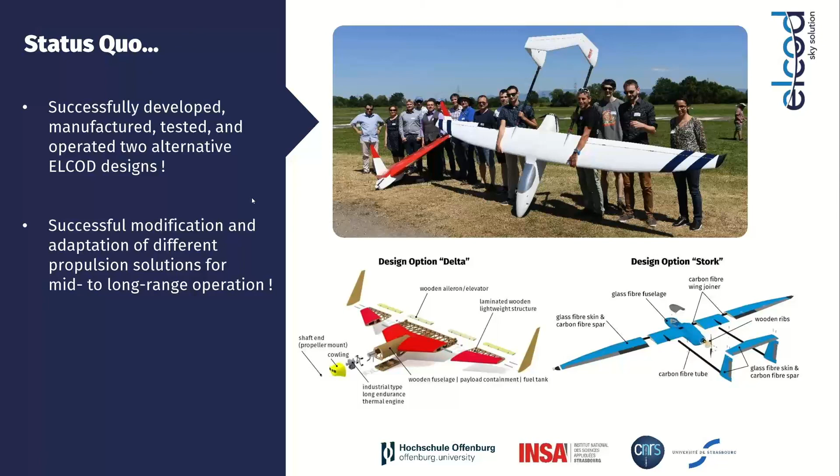So yes, again, let's have a look. We have two designs: the Delta design and the Stork design, which evolved from different perspectives, I would say. If you look at the Stork design, the basic idea, if Renault agrees with me, was to apply a fuel cell engine, fuel cell propulsion, and therefore it's more or less for mid to long range applications, whereas the Delta design evolved from aiming at long range applications where you need to carry a lot of fuel with you and where we need a thermal engine. So we have seen that we successfully derived these designs, built these designs, got these designs into the air, and they successfully fly now.

Also, I don't want to forget to mention that our partner from the CNRS successfully developed, manufactured and tested their sensors. So at this stage of the project, we can successfully fly and capture the data for air quality measurements, and further applications are focused on now. We have seen recent activities finalizing the optimization and application of fuel cells, starting two PhD theses on fuel cell application and on the flax fiber investigations. I think very encouraging and very interesting topics.

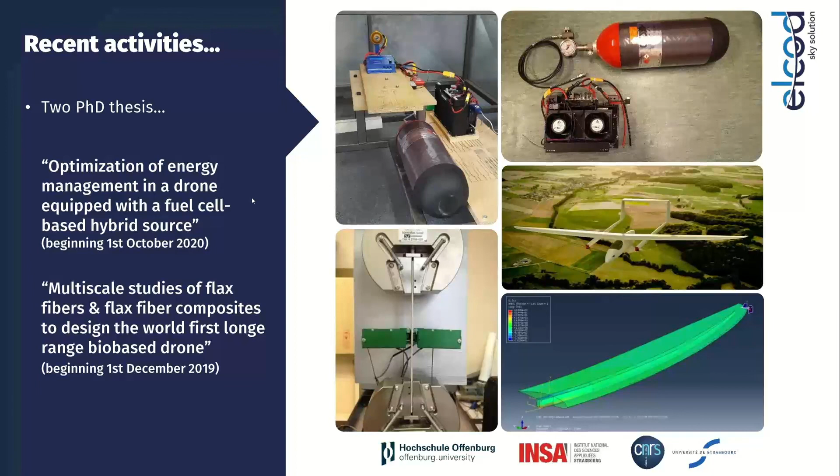And there is an additional item I would like to present to you, a follow-up activity. The project partners started to think about what to do in the time after the ELCOD project, and together with some new partners, we developed an idea for an extended or new project, which we called the AELCOD project, which goes a bit beyond the basic idea.

During the ELCOD project, starting in 2017 until 2020, we had the chance to develop two different prototypes for a low-cost, long-range solution. And if you look at what we've seen today, we succeeded in this. And now we are looking forward to getting these prototypes into real-world application, which means in a follow-up project, we would like to implement these technologies in real scenarios, in real solutions. So we are now at a technology readiness level of about 5.

So we have basic prototypes, basic features, and now in this new project we try to establish some solutions and some applications from basic technology readiness levels of 1, 2, 3 up to a technology readiness level of 6, to get some optimized prototypes and get them into the application of real world use cases.

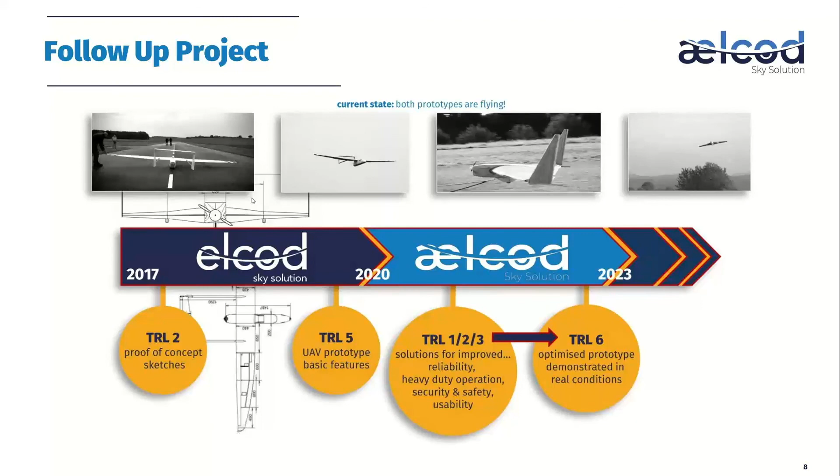So for this, we got in contact with different partners from different countries all over Europe, and we achieved to get access to 4 different airfields in Iceland, Greenland, and also in Morocco. And for this, we developed an idea for different applications.

For example, we had some guys interested in volcano research, so they are interested to fly to a hazardous area to take pictures where you normally don't fly with manned aircraft.

So in course of this new project idea, we would like to develop some business models for these certain application areas and to further develop and optimize our basic ideas, which means that we have to extend the current state of the project by having some more sophisticated takeoff and landing systems, some more robust and automated systems that we have to further optimize, and improve the robustness of the propulsion systems.

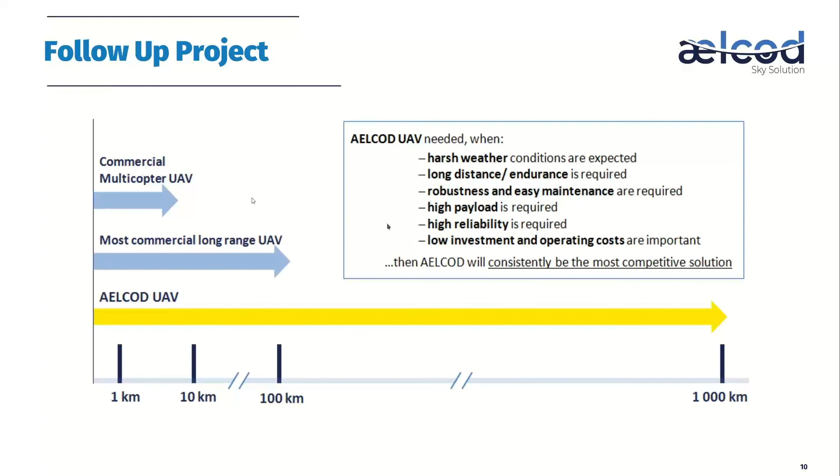But what we are aiming for with the AELCOD UAV is a range of above 100 kilometers, up to a few hundreds, or let's say up to 1,000 kilometers. So that is what we are aiming for in this AELCOD project. So harsh weather conditions, long distance and high endurance, robustness, high payload, reliability, and all of this with low investment costs in mind, so a low cost solution and a robust solution.

For this, we were able to get some of our long-lasting partners, let's say INSA, CNRS, in-air solution, and some new partners with quite interesting application areas. For example, the African Institute from Belgium, where you have guys interested in volcano research, some guys from the Iceland University which are interested in transportation issues,

guys from Blue Novation, which are experts in communication and modern platform management, electronic platform communication, image processing, and also partners from Steinbeis, which are experts in European consortium management.

So these are consortium partners, and on the other side we have partners from the application side. They are not funded partners in the project, but they can be thought of as kind of an advisory board and stakeholders for the applications we are aiming for. So companies from, for example, Iceland, SAR, the Coast Guard. We have the gendarmerie from France. Just help me. Mountain activities. Yes, it's a mountain police, let's say. Also interested in search and rescue applications.